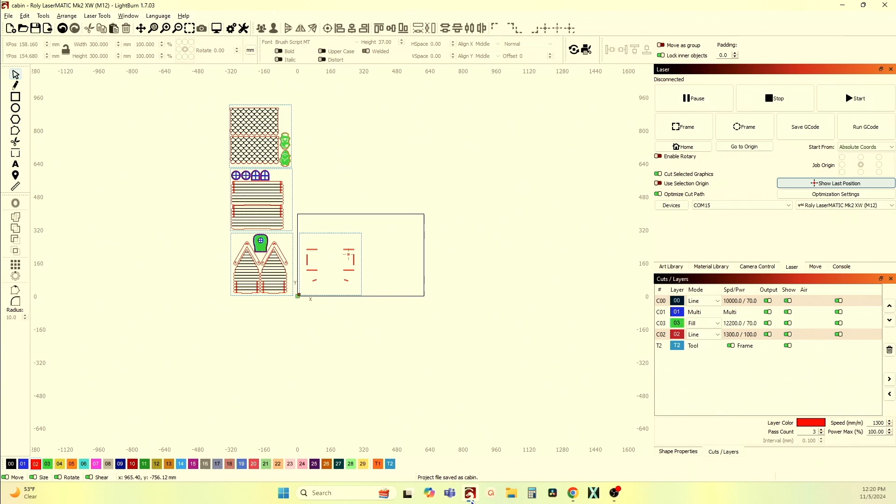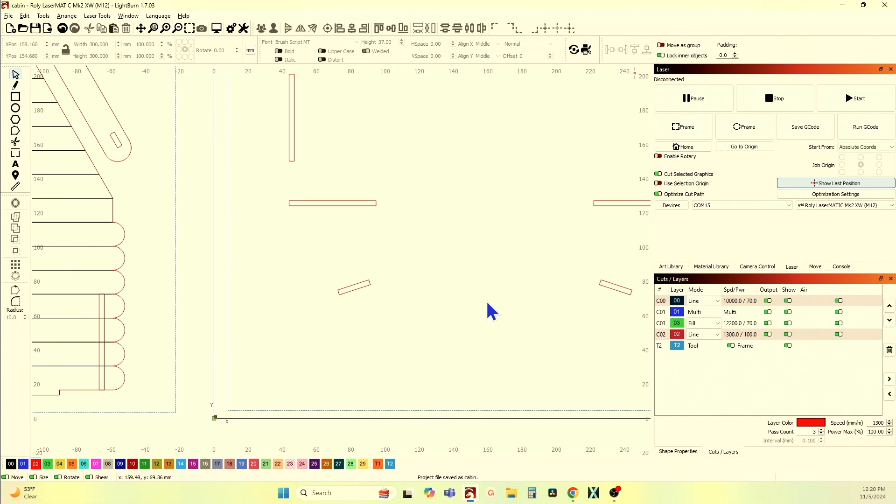As is, the file is going to come with — I've got 2 Christmas decorations on here now that will come with the file, but they are just examples, and you can use them or create your own. These are not very difficult to do. I've got Frosty and Santa in here that have slots that stand on either side of the front of the cabin. But you can create Easter bunnies, jack-o'-lanterns, all kinds of different things that you can sit out here and place in front of the house.

And where you put these slots is where you would have it displayed. Like the one I have with the Christmas tree, I moved Santa over here with Frosty and put a Christmas tree over here by itself.

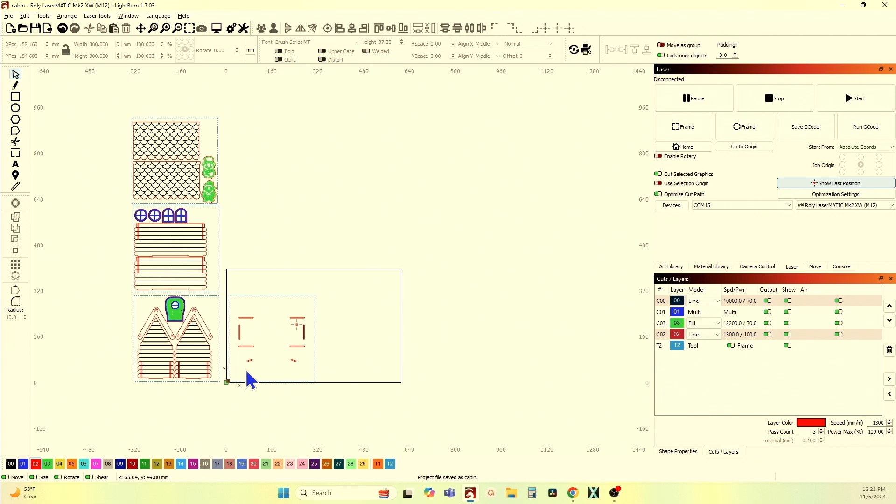But these are the 2 side pieces, and they have slots in the bottom that interlock with these slots on the front and back sides of the house, so they just slide together. There are tabs on the bottom of each, the front and the back, that fit into this base plate, and gravity will hold it in place. That just helps keep everything square and locked together.

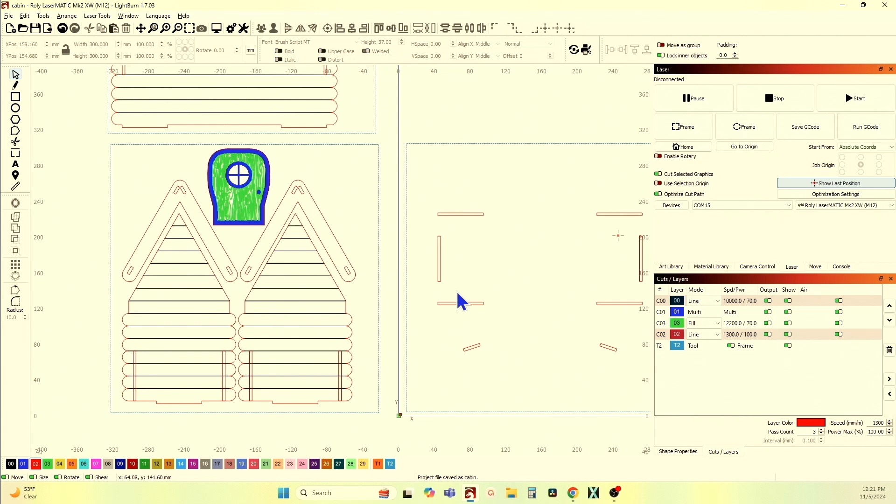Now the roof panels — I've got 2 eaves, or 2 side pieces, with slots in them, and your 2 roof panels here with tabs on them. Now, I found that in order for this to be... it's one of these situations where it's kind of tough to have your cake and eat it too.

You can make this so that it goes together without glue, and friction will hold it together for the first 3 or 4 assemblies, but then it would be too loose. If you make it tight enough that friction will hold it together, you run the chance of damaging it whenever you go to disassemble it, and it's tough for little hands to put together. So I opted not to make it super tight to put together.

I left the kerf on this the same, and it goes together, but I actually glued the roof panels together. The 2 end pieces got glued to the 2 roof panels, so the roof is one solid triangular piece, but it's not attached to the cabin. It's just sitting on the cabin.

So if you decided to use this year round with multi-seasonal decoration pieces, you can actually store them inside the house. Just lift the roof off, put in your pieces you're not using, pull out the pieces you want, redecorate it, put your roof back on, ready to go.

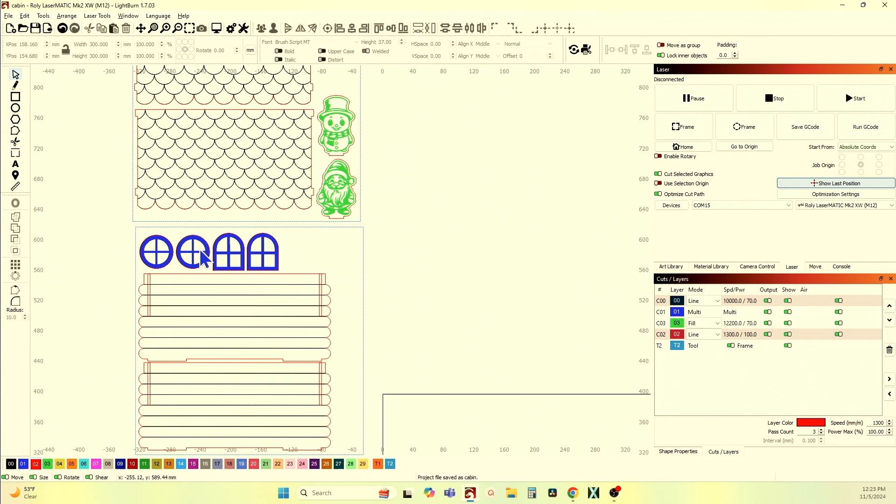So I did glue those together, and then I did glue the windows onto the side of the house and the door on the front of the house. But this is such a simple piece to create. And like I said, the side panels interlock with the front and back panels, and they just slip together.

In fact, let's see if I can pull this one off a display and show you how simple this is. Let's take Santa and Frosty.

These are made so that you can interchange them. They're not glued in place. They're just sitting in slots. Just lift them out of their position.

Same goes for the Christmas tree. Just lift them out, and then we'll pull it apart. Let's pull the whole tree up. Roots are getting deep. All right, now that I've got that separated, I can actually, and I don't have the house glued to the base either.

Because if you wanted to take it down and store everything, there's no need for it to be glued, so that can lift off the base.

And then the roof, I want to pull the front and sides off. See, it's empty there. It's a large void to use as storage.

Oh, and the friction just let go. Now the roof, big wind. That's like the piglet's house. Big bad wolf. The roof just comes off.

Now, like I said, I've got this one glued up so that this stays together. But then that just fits right back down on top of there. And you can set that back into place.

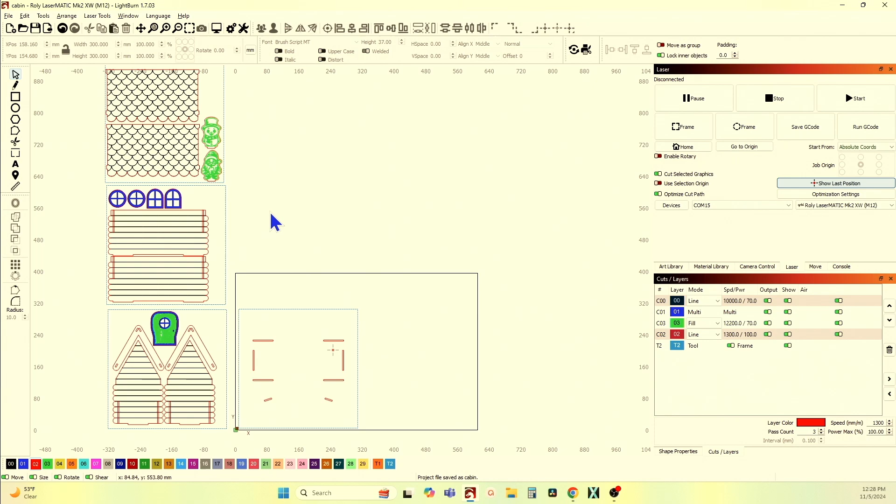If you have artwork that you wanted to create a little figure like my Frosty here, you need to know if you're going to use the same existing slot, then you need to use the slot that's in the base as your template to attach to your figure.

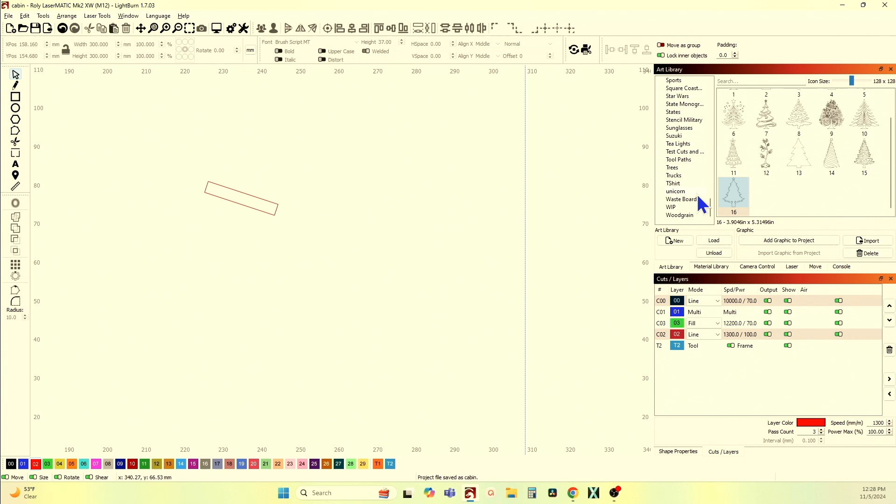So let's jump over here, and I'm going to go into my art library, and we're going to get... let's see here, maybe it's under Christmas. No. Oh, it's under snow. I always get it under snow. Yeah, there it is, snowman. So there's my figure I want to create to sit in my piece.

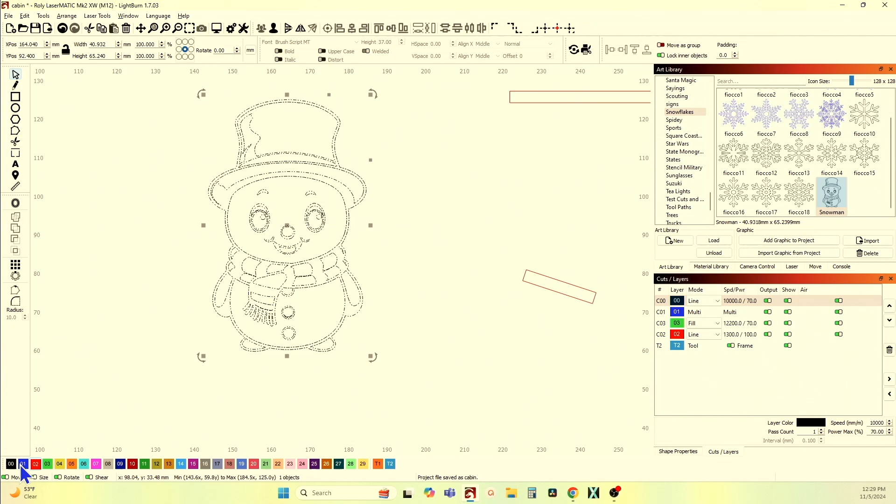Now right now it's just some basic artwork. Let's put him in fill mode. There, it makes him a little easier to see. And let's group him up, just make sure he is grouped.

Okay, first thing I want to do is set my height. How tall do I want him to be? I would compare it to the front of the house, or my door. I'll compare it to the door. And that doesn't actually look that bad. Looks like he could go through that doorway without any problem. He might need to be a little bit bigger even. Not much. But let's make him just a wee bit bigger. There you go, that looks good.

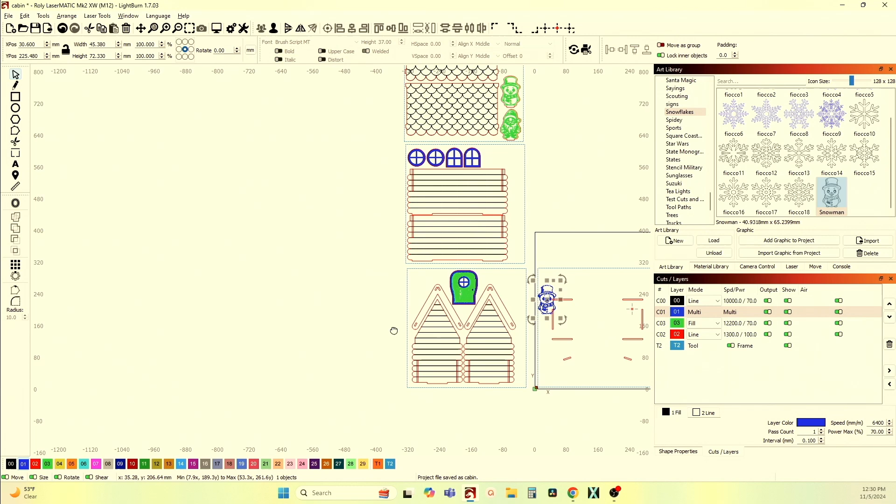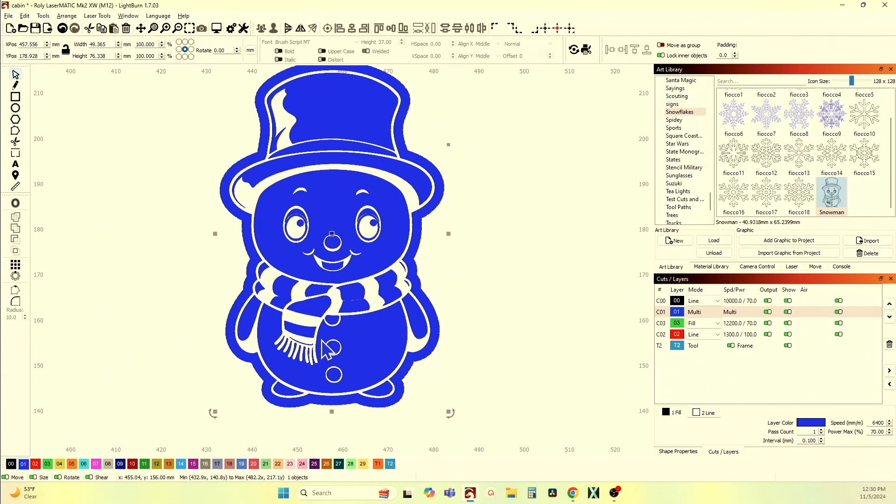Alright, now that I've got the size that I want for my snowman, I come over here and I'm going to do an offset. I'm going to do a 2mm offset, outer shapes only, select the results, do not delete the original, leave that turned off, do it round, and say OK. Now put that on a cut path, and there you go. You've got a 2mm cut path around your figure.

But now you need to add your tab to mount it to the base. So as I said, you want to be able to recreate these. Over here they're grouped. I'm going to just duplicate that group and bring it over here. Ungroup it. Delete that one. Now this is mounted at an angle, so I'm like, okay, well, how do I figure out that?

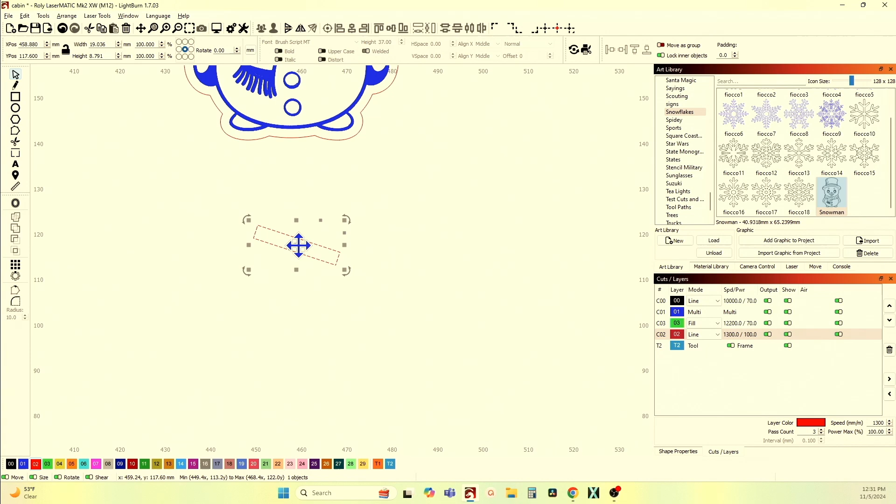Well, we're going to rotate it so we can get its exact measurement so we know for sure. Or you could use your ruler. Come over here, and this is 3mm by 19.05. 3 by 19.05. We don't need to rotate it, we just use the ruler.

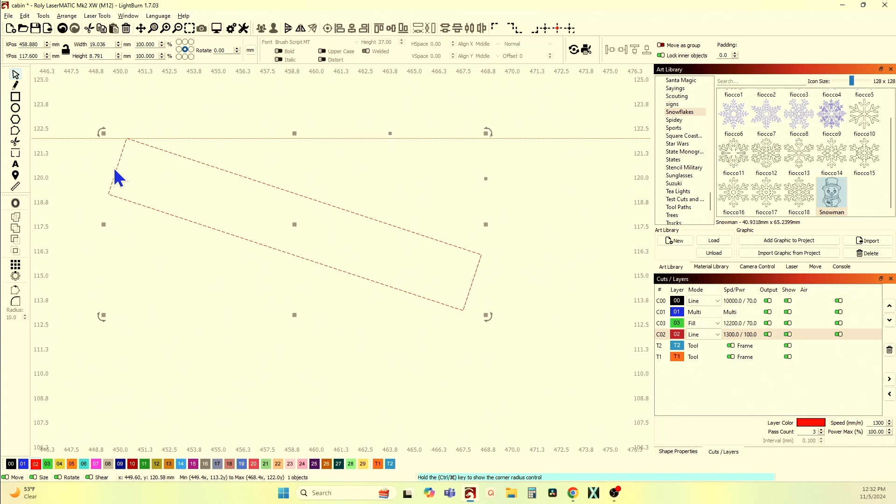And now I'm going to select that piece and say Control D, duplicate, and that'll give me my first anchor point by left clicking right there, and then come over here on this line and left click and hold it and rotate up until... it doesn't matter where you do this line out here because this is just for alignment's sake. So I bring it there, and then that is now perfectly set up.

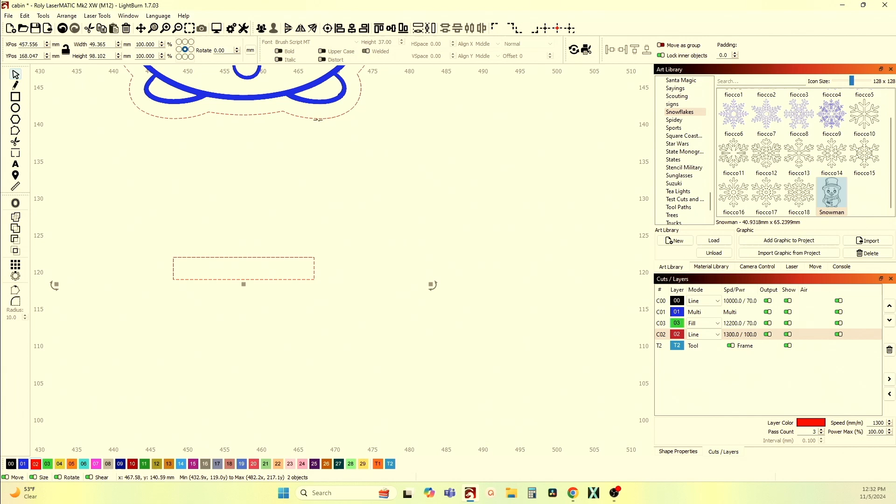I can delete that, center that, Alt Control V. Well, didn't do that. There. Alt Control V... Alt Shift V. Dummy, not Alt Control, Alt Shift. Okay, so there, that lines that up, and that's the size I want, but I've got all this gap in there. Don't want that. So, and there it's not touching.

There, it's not touching, it didn't actually put it up there. So now I can take a look at this, and there are so many ways to do this. You could go into node editing, clean up all those curves, get rid of all that, make it a straight line, butt them up and weld it together, and then you don't have to resize anything. Everything's good and golden. Or you can do this.

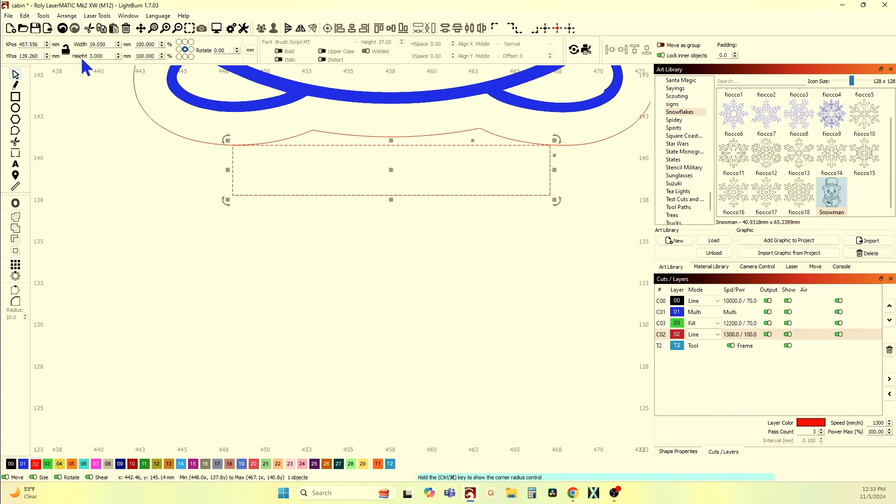If you know it needs to be 3 millimeters in height, and we're not going to change the width, I take this and move it—oops, too far—hold shift and arrow it up, and bring it up where I'm fully encompassing the base of the snowman, getting rid of all those curves. Now I can hold shift, select the outer cutout I just did on the offset, and weld that together. But that's no longer 3 millimeters.

So what? Go into Tools, Resize Slots in Selection. This was 3 mil, but it's not now because we made it so much smaller, and I need it to be 3 mil, but I have no idea what that is because I didn't measure it in advance. That's okay, I'll just keep increasing my tolerance until I pick it up. Oh, I gotta set the tab height, stupid. There we go, didn't have that right.

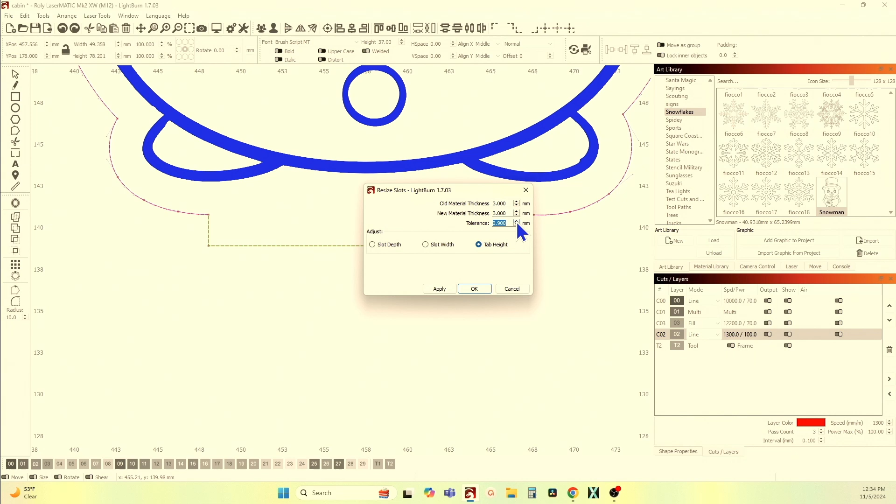So let's put that back down to zero so you can see. I selected my tab height—old material is 3, new material is 3. This isn't 3, but if I just keep increasing that tolerance, once I get within that tolerance, there it goes. It highlights and says, there we go. Say OK.

And now if I measure that, I've got a 3 millimeter tab sticking out of the bottom of Frosty that will fit into that slot.

There's always another way, and sometimes we overcomplicate things—I'm even guilty of it, and sometimes I still do it. I get caught up in the design process, like okay, I gotta get this just right and perfect so I can weld these together exactly how I want it. You ain't got to do all that. Just overlap them, weld them together, and then set your tab and slot size with the Resize Slots in Selection tool. Easy peasy.

But that quickly you can create different figures that will sit in the existing slots in your base, or you can have multiple bases so you can have a different orientation for different scenes. And come on, I'm trying to do this from a seated position, can't see the slot. There we go.

This is simple, easy to do, easy to recreate if you wanted to do it yourself. No slots and tabs to assemble the cabin, they just slip together. The roof does have slots and tabs for the corner pieces, and I did find it necessary to glue that together so it would stay together.

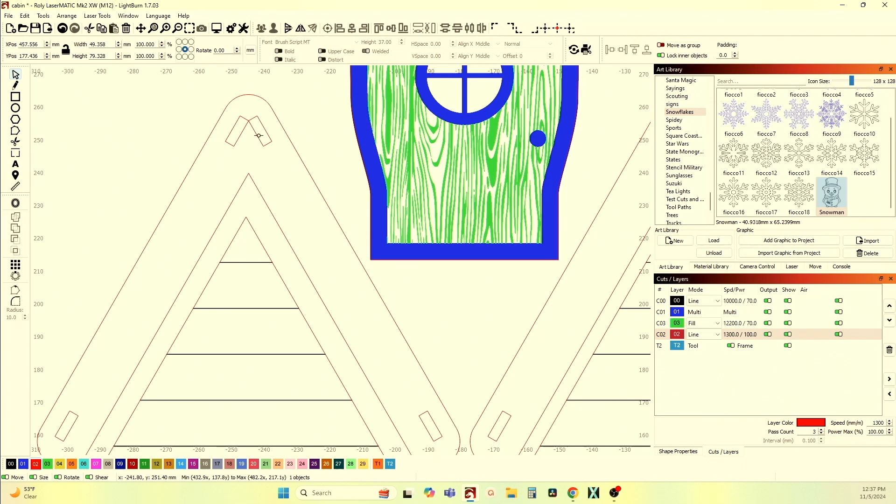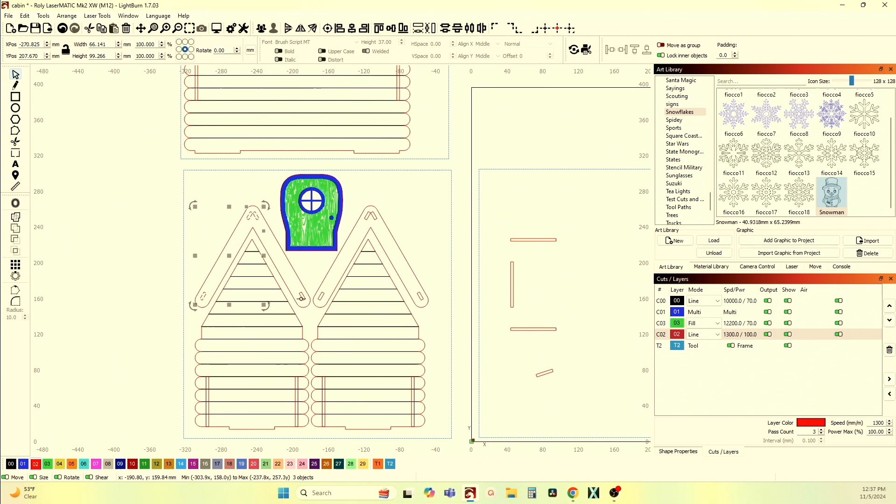But the corners, the angle pieces for the roof—these guys with the inner slots for the roof panels to stick into—I would not add kerf on those, because when you add kerf to these enclosed corners, it adds kerf on all four sides, and that might make it a little too tight. So what you would do is select those and put them on a different layer with your cut settings. Come on, there we go—no kerf added to it.

But if you're going to do it for children to assemble, and these are so easy to do, you could even—if you've got grandkids coming over, two or three youngins that are going to be there, and you want to keep them busy for a good hour or so—cut out two or three of these.

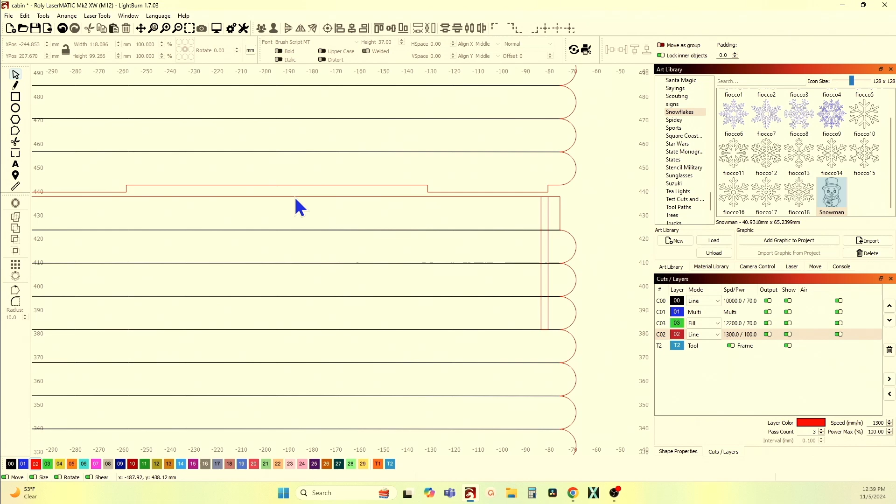So if we look at these pieces, right now when you select that whole thing, you get all of that. But in fact, we need to talk about the black layer too.

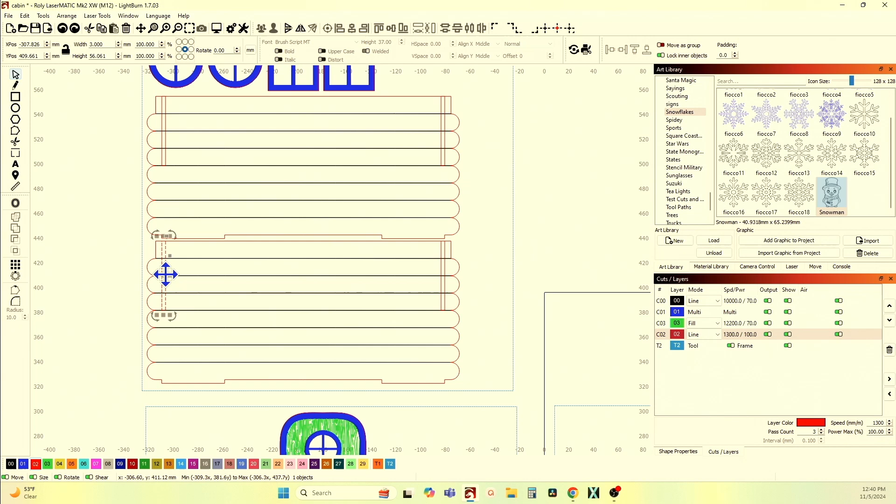If I ungroup that, you could then grab those, and you can move them around. They're not attached to the design, so that you can resize those slots with your material without any design problems.

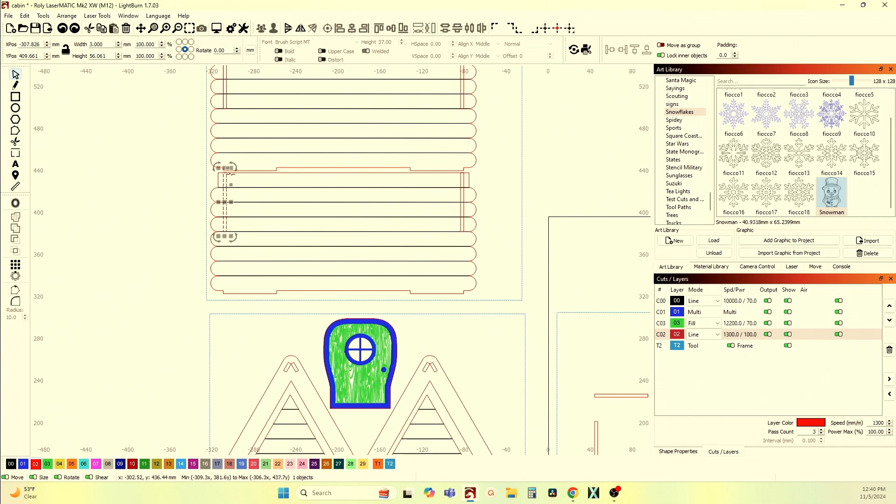With this as it is, you could just go ahead and subtract them out and it would still work. But depending on what you did to your design, you could possibly interrupt that or keep it from being edited correctly. So they are not attached to the design as is.

And when you select your piece and you say, I want to resize my slots and tabs, well, you've got slots here and tabs at the bottom. If you're making it all out of the same material, you simply go to Tools.

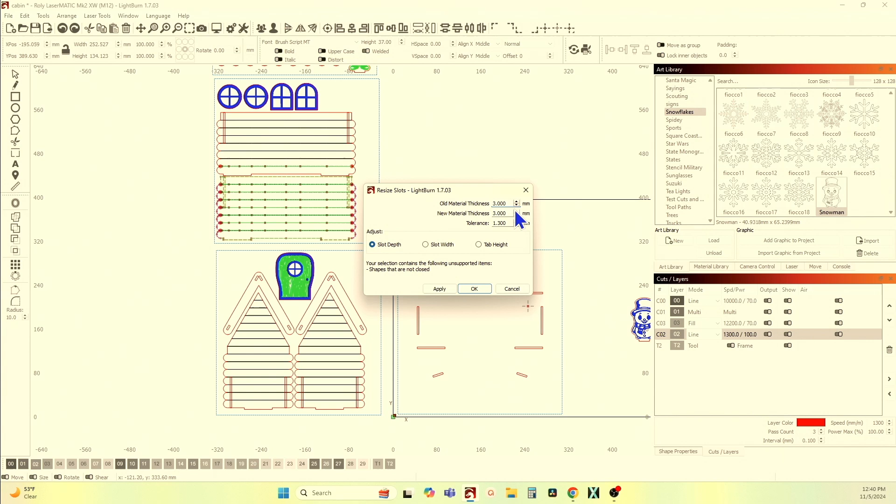Resize Slots in Selection, and we're going to change it from 3 millimeters to 4.5 millimeters. You're changing your slot width. Well, there's your slots, and there's your tabs. You would select one, click Apply, select the other, click Apply, and it changes.

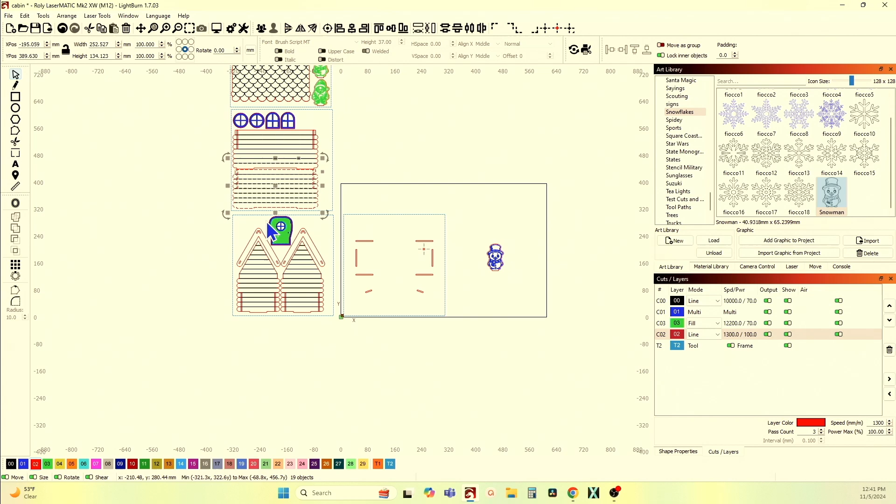Now I would do each of the panels as you cut them out and come down here and do these the same way, just changing the size to match your materials.

There are a lot of people who aren't going to get this far in the video or watch it at all, and they're going to have problems with the way I have this file set up, because I've done some things with the engraving to cut down on the amount of time the laser is being used considerably.

With the lines for the logs, to differentiate each log from the other, they are not in fill mode. They are simply lines. I wanted them to be significant enough to show up from this far away, but not be forever under the laser just doing a simple line.

All your diode lasers vary slightly in spot size. The lasers I'm working with have an advertised spot size of around 0.08, give or take, which is pretty average. They're going to be very close to that in most of your smaller diodes.

So instead of doing a 0.08 engraving where it's a solid fill, I do two lines that are 0.08 away from each other. When it does the first line, it's about 0.08, then it jumps up and does the second line, which is about 0.08, and they overlap each other simply because of the spot size of the laser.

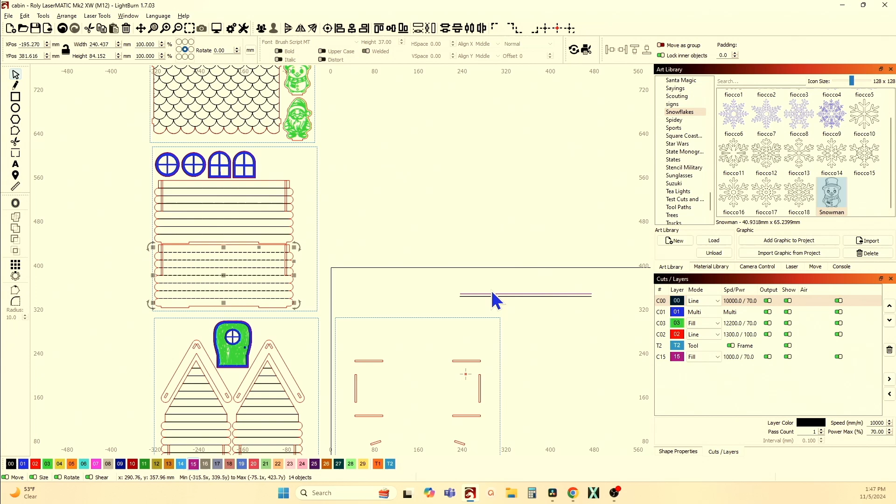So if we look at the front and back of the cabin, there are a total of 14 objects here. There's 14 lines, so 7 solid lines if they were solid. I've recreated these lines over here, and I've created a solid piece instead of lines of equivalent appearance.

I'm trying not to get things too confusing, but if I look here real close, you can see there are two individual lines here. If I measure the distance between this line and this line, it's 0.08 millimeters. So if my spot size of my laser - and it's not round, it's elliptical - but for argument's sake, we're going to say it's 0.08 millimeter diameter.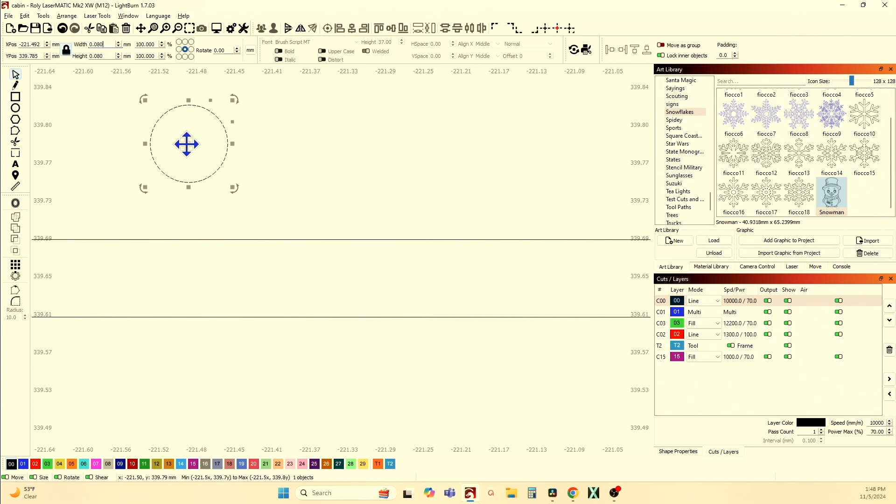Put it in line mode. We're going to bring it down here and put it right there on the line. That's how it would be. Control D, duplicate that, and let's move it up here to the next line.

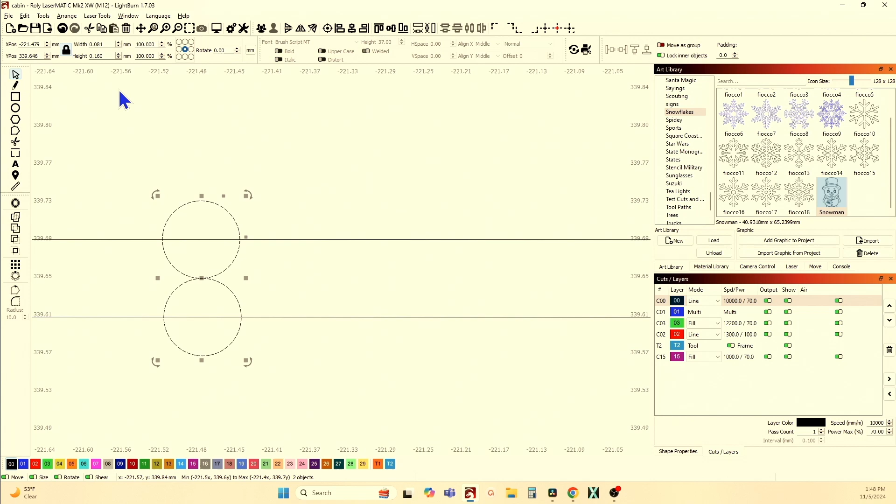And now we look at that total size, it's 0.16 millimeters. Because if the laser beam is going to go right down through there and right down through there, and it's got a 0.08 spot size, that's going to be the actual result. It's going to be about a 0.16.

So let's get rid of these guys. Come back over here, and I need to change this one to a 0.16 in height. Oops, I had aspect ratio locked. Let's undo that, unlock it. The height is 0.16.

There we go. So now this, when we measure it - have I got too many lines in here? Yep, I got too many lines in there. We've got to fix that.

Let's look at this. Measure from here to here. Doesn't even show up, so let's select this one and delete that. Measure from here. Sorry about that. There we go. There's 0.08.

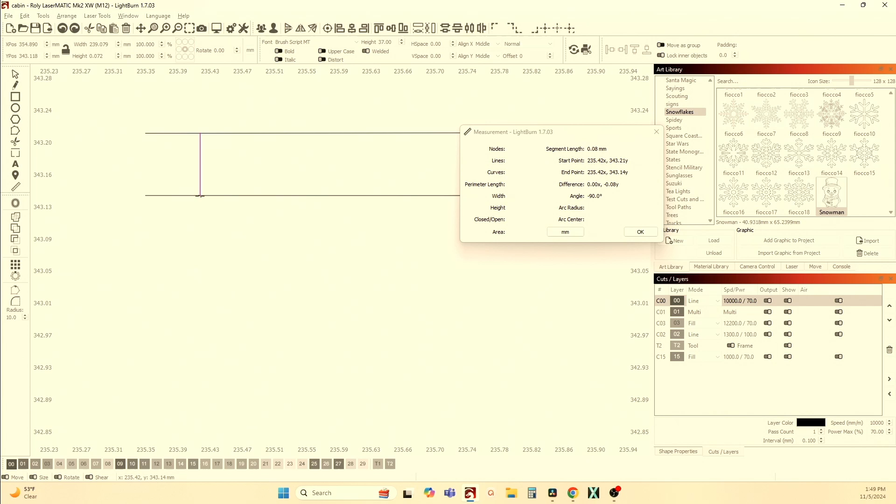Those are 0.08 apart, just like the sides of the cabin. They're 0.08 apart. And when I look at this and look at the preview, it's telling me 4 seconds to engrave that line. 4 seconds.

If I look at this one, which should be equivalent, it's 30 seconds. 30 seconds.

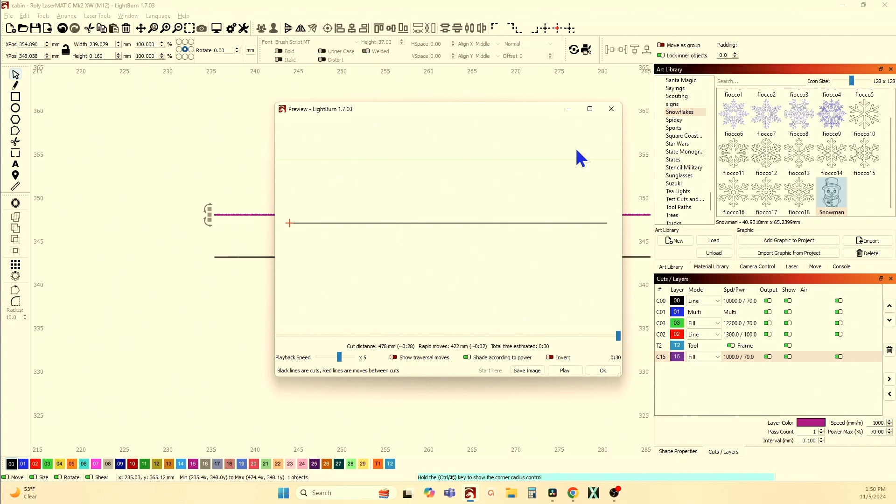There are 14 pairs of those lines. So I would have - calculator - 14 pairs at 4 seconds. 14 pairs times 4 seconds, that's less than a minute to engrave all of those logs on there in line mode.

Since these are solid, I don't have 14 pairs, I just have 7 individual pieces, and those are 30 seconds each. So 7 times 30 is 210 seconds, divided by 60, it's 3.5 minutes versus 56 seconds.

3.5 minutes versus a minute. So 3.5 times longer by doing it in fill mode - 7 individual fills versus 14 lines that will end up burning the exact same result.

So something to think about when you're doing your design pieces, if you're needing to create simple lines instead of doing offsets and creating a fill mode to create real little thin lines. This would save you a whole lot of time, and like I said, so many people are not going to get this far in the video or watch the video, and this is a huge time saver.